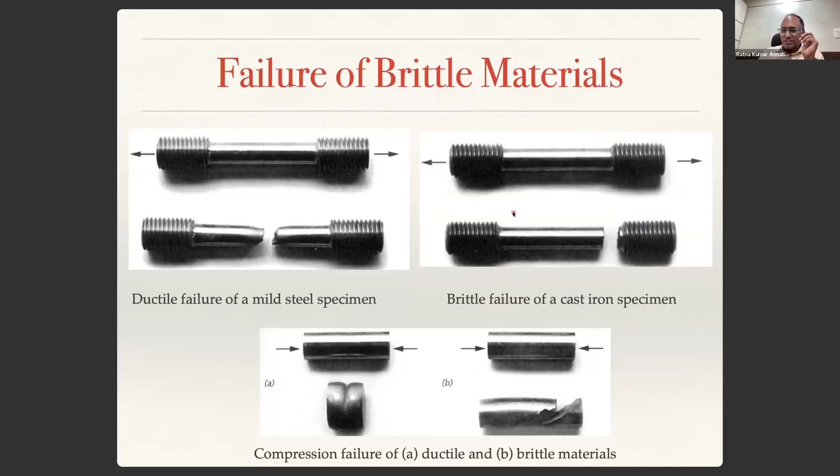We have to understand that brittle materials do not yield, they rather fracture. For brittle material, fracture in tension is only due to normal stress, because the failure is completely governed by normal stress—whichever plane has maximum normal stress, that plane is going to break apart. So now, because the critical stress is only normal stress, we need to use the maximum normal stress theory, which says that failure occurs wherever the maximum normal stress reaches the critical value. Here the critical value will be ultimate strength rather than yield strength. So the maximum normal stress theory can be applied for brittle fracture in tension.

Now for compression, you can see that failure happens due to a combination of normal stress and shear stress. So brittle fracture in compression is due to a combination of normal and shear stresses, and hence it requires a different theory—you cannot use the same theory as for normal tension. Depending upon the type of loading, you have to use a different theory. So when the loading is tensile, the failure can be completely governed by the normal stress theory, whereas when the loading is compressive, the failure is not governed by normal stress alone; the effect of shear stress also comes into picture. This is something we have to keep in mind.

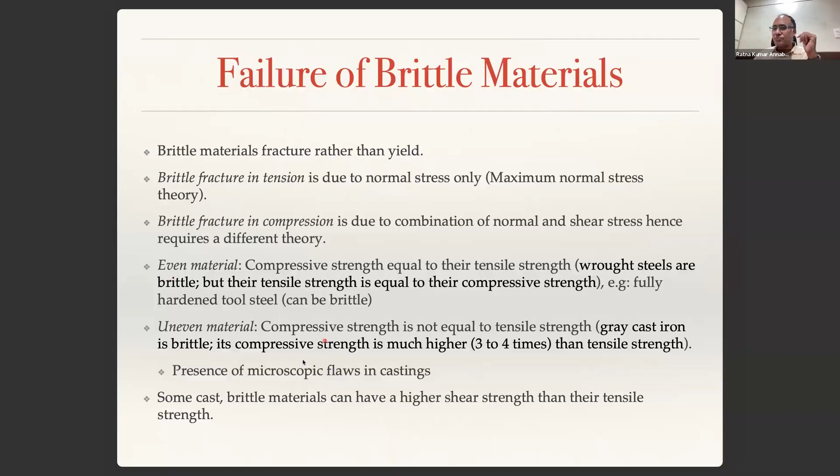This is because in castings, you have several microscopic flaws that become fracture points. So it's much easier to open a crack under tension rather than under compression—that's why under compression they have much higher strength. Sometimes some metals also show uneven response in yielding, but let us not worry about that at this point of time.

Now, if you take a ductile material and instead of applying tension you apply torsion—that means pure shear—you see, in the previous case when applying uniaxial tension, the failure happened at a 45 degree angle. But now if you apply torsion, the failure happens normal to the surface. Can you explain why it would happen normal to the surface?

Shear stress is maximum normal to this plane because you are applying pure shear. Your maximum shear stress is going to be in the same plane. That is why the maximum shear stress happens on the same plane, because you are applying shear stress and the maximum shear stress is going to be on the same plane. That is why the failure happens normal.

But if you take brittle materials, they are governed by their maximum normal stress. So if you are applying torsion, the normal stress is going to be maximum at an angle of 45 degrees.

Because if you draw the Mohr circle for pure shear, it will be centered on the origin of the sigma-tau plane, and the maximum normal stress will be at an angle of 90 degrees to the maximum shear stress. That means it is 45 degrees in the physical plane. The normal stress is maximum here, and that is why the breakage happens at an angle if you take a brittle material and apply torsion.

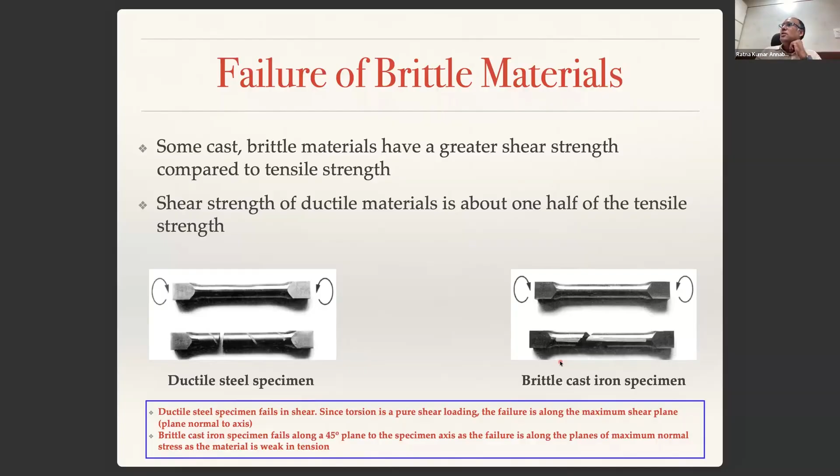Now, if you plot your Mohr circle for the case of failure: let's say you are doing a tension test, and this is your ultimate strength. When you apply ultimate strength on the tensile side, this will be your Mohr circle failure surface. If it is an even material, the ultimate strength in compression is the same as in tension, so on the compression side this will also be your Mohr circle.

Then the tangent line joining these two circles represents the failure line. So any intermediate stress state, as long as it does not become tangent to this line, will not fail. Otherwise, it will fail. That is the idea.

Now, if you have an uneven material where under compression you have a larger ultimate strength, it is like pushing this circle, and then this line is your failure line, whose angle is mu. This is what we call the friction angle.

Now we can write the equation of this line on the sigma-tau plane. Earlier we wrote failure theory on the sigma1-sigma3 plane; we could also write it on the sigma-tau plane, which is much easier for brittle materials. You see that the failure line is given by tau equals tau_i plus mu times sigma, where tau_i is wherever this line intersects the tau axis. So shear stress equals tau_i plus mu times sigma is your failure line.

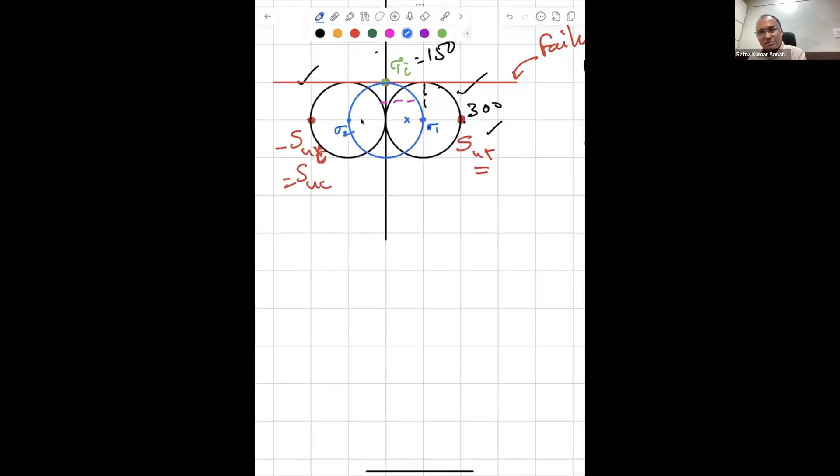Yes sir. If instead of minus 150, my sigma 2 is equal to, let us say sigma 1 is equal to 200 and sigma 2 is equal to minus 150. What is the tau max here? Our requirement is tau max is how much? 200 plus 150 by 2, isn't it? Yeah, 350 by 2, that is 175.

175. What is tau I? 150. So now 175 is greater than 150. So that means this has failed, right? Because this tau I is 150, no? So now let us draw these things: 200 and minus 150. Let us say this is 200 and minus 150. Let me draw that particular circle.

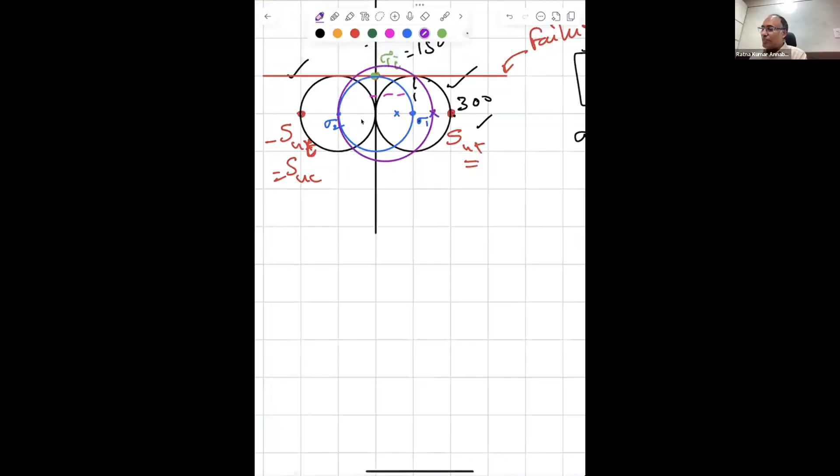What happened? This circle went beyond that failure line, isn't it? Yes, sir. So that means it has failed, which we were actually able to see from here.

So the point I'm trying to make is, if you identify the failure line, and if a material is failing, then the corresponding Mohr circle should become tangent to the failure line at best, or it should not cross the failure line. If it crosses the failure line, the factor of safety is less than 1. If it becomes tangent, the factor of safety is 1, meaning it has just failed. If it is under the failure line, the factor of safety is greater than 1.

So now, in the same picture, let us take the scenario of uneven material. If you have an uneven material whose failure surface is, let's say, sigma UT or SUT, and SUC is double that. This is my SUC, UC, which equals minus 2 times SUT. In this particular case, it is double.

Now, if I draw the Mohr circle for the uniaxial tension case with SUT, let me draw that again. Oops, happened. So that is my uniaxial tension case Mohr circle.

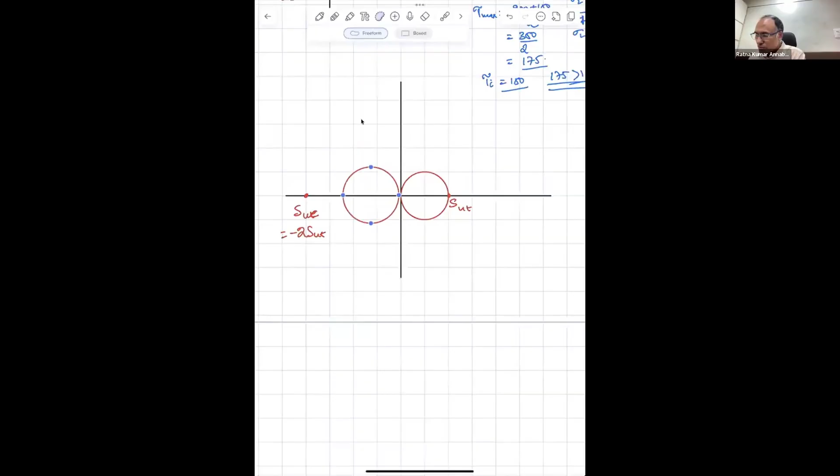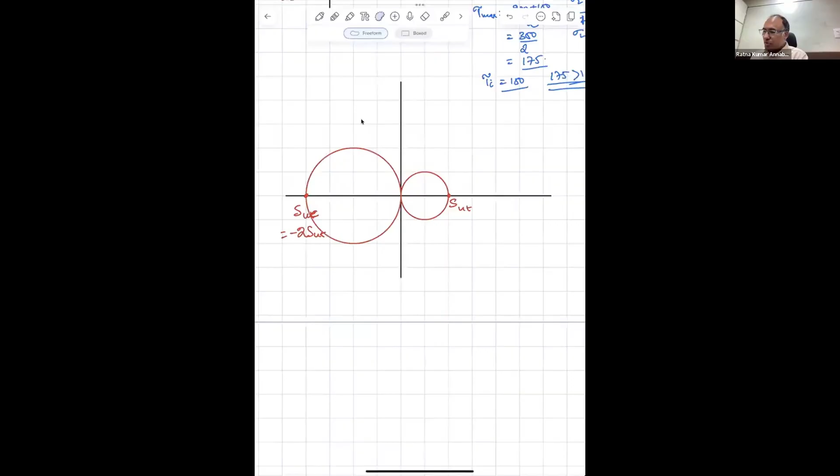And similarly, the uniaxial compression case, so that is the Mohr circle for uniaxial compression. Now, how does the failure surface look like? That should be tangent to these two lines, right? So now I need to draw a tangent.

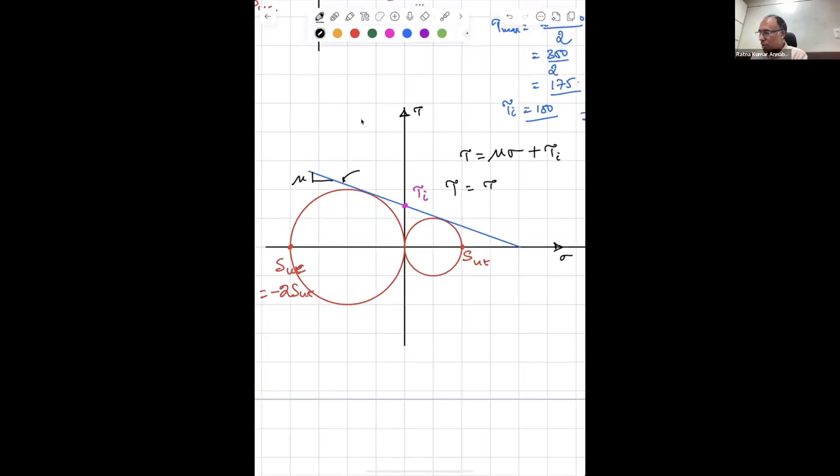Right, I have drawn this tangent, and this tangent intersects at this point. Let me call that tau I. And the slope of this line is mu. This axis is sigma, and that axis is tau. Now, the equation of this line: tau is y, m is mu, x is sigma, plus y-intercept tau I. So I can write tau equals tau I plus mu sigma. That is the equation of this failure surface.

Now, whenever you take any stress state, you plug it into this equation, and if the stress state satisfies this equation, then it is failing. If tau is less than tau I plus mu sigma, then it is safe. Otherwise, it is not safe.

Or in other words, if you plot sigma 1 and sigma 2, and then draw a Mohr circle, and this is inside the failure line, hence it is safe. But let us say, when will it become unsafe? Let us look at that.

So sigma 1 is the same, but let's say sigma 2 is changing. So when sigma 2 reaches this value, you can see the circle is becoming tangent. So if you have sigma 1, your sigma 2 cannot be greater than this value, because beyond this value the circle is going to cross the failure line. So given sigma 1, your sigma 2 should be less than this value. Only then will the material be safe, otherwise it is unsafe. Is that clear?

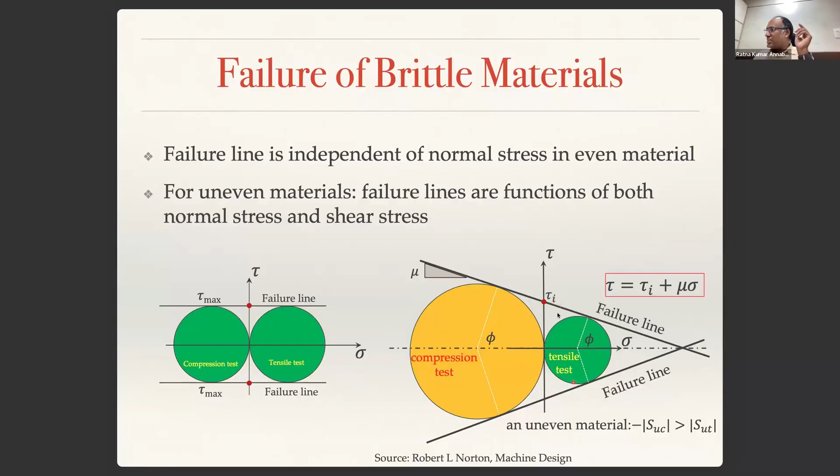Then you have the Mohr failure line; instead of two circles, you can draw a straight line, but ideally you should also do a shear test. Then you should draw a common curve that is tangent to all three circles. So then it will not be a straight line, it will be a curve, called the failure curve. This failure curve is called the Mohr failure curve, and this is what we call the Mohr hypothesis.

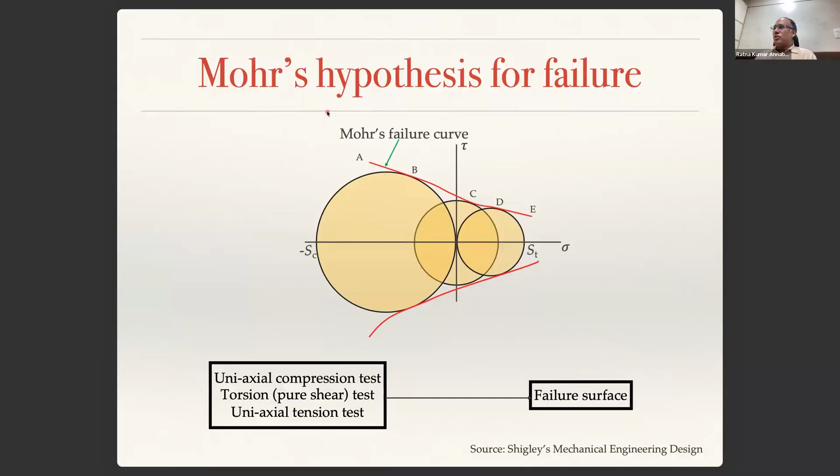So now let us look at the theory for brittle materials. This is what we call Mohr-Coulomb theory. So now let's say this is your uniaxial tension circle, and this is your uniaxial compression circle. Any questions there?

Once you have the uniaxial tension circle and uniaxial compression circle, you can draw a Mohr-Coulomb failure line, which decides what tau is and so on. Now, if you draw a stress state corresponding to sigma 1 and sigma 3, and this circle becomes tangent to the failure line, that means it is failing. So let us look at the stress state corresponding to sigma 1 and sigma 3.

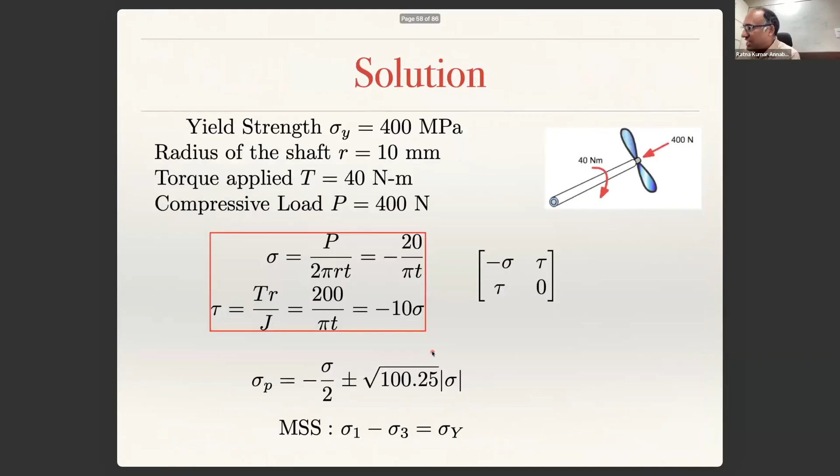So there is a similarity between maximum shear stress theory and Mohr Coulomb theory, except that it is an uneven material, and hence it becomes sigma 1 by ST minus sigma 3 by SC equal to 1. So what we have done, why have we chosen this pink circle? Because this pink circle is also a failure surface, so when failure happens, this equation will be satisfied. Sigma 1 by ST minus sigma 3 by SC should be less than 1 if the material is safe, or equal to 1 or greater than 1, the material is unsafe. This is what we call Mohr Coulomb failure theory.

Now I will not draw this line for you. So ST is ultimate strength in tension, SC is ultimate strength in compression. So now let me, without spending much time, recall how we have drawn our failure surface for maximum shear stress theory. For maximum shear stress theory, the way we have drawn the failure surface is: this is my sigma 1, that is my sigma 3.

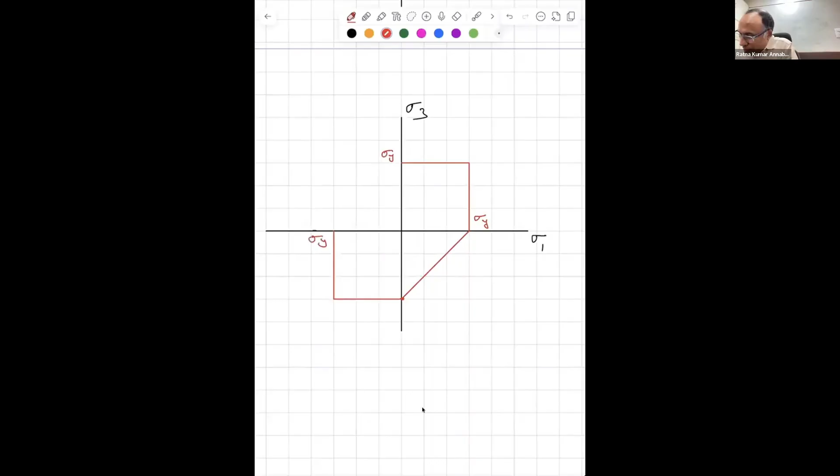Now, in the first quadrant, because that is my sigma y and that is my sigma y, 1, 2, 3. And here this is sigma y. This is how my maximum shear stress theory looked like, right? This can be written as sigma 1 by sigma y minus sigma 3 by sigma y is equal to 1. Can I do that? That implies sigma 1 minus sigma 3 is equal to sigma y.

That is how we have generated this. We have discussed how we got these lines, correct? All of you agree with this or not? Yes, sir. So now what I want to do is sigma 1 by, instead of sigma y, ST minus sigma 3 by SUC equal to 1. That is what I wanted to deal with.

So all that I need to do, let us say this is my, this is also my SUT. But SUC, this one, SUC is greater than SUT. So let's say that is my, in the negative direction, I have to identify SUC. And this is my SUC. For each, both of them are normal stresses, no? And this is my SUT. Agreed?

So now, in the compression side, when both are negative, because it is an even material, this bounds are sigma y and sigma y. I have drawn these lines, but now it is a different value. Then I would draw this. On the tension side, it will remain this because that is SUT. And now these slant lines will be between this fellow and that fellow, just by looking at this equation.

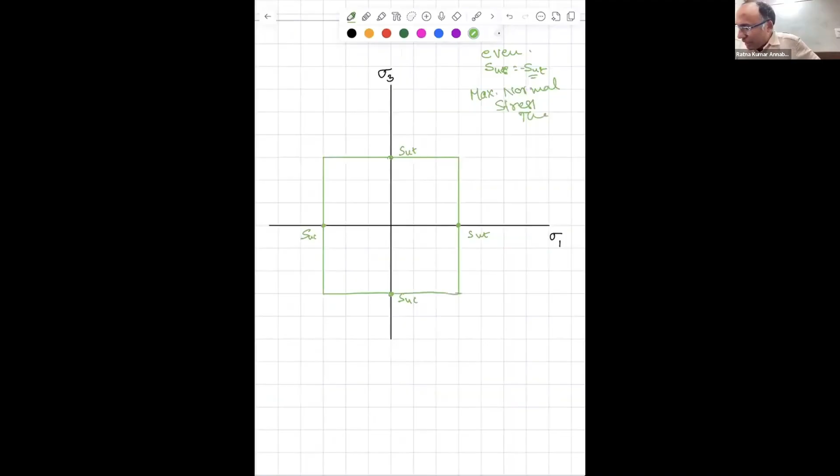So if it is an even material, my maximum normal stress theory - what does normal stress theory say? That the normal stress should not be more than sigma y. So my failure surface will be a square. That is my maximum normal stress theory, isn't it? Yes, sir.

For an even material - for an uneven material, all that I need to do is identify my SUC. Let us say that is my SUC, instead of tension this much, but in compression, that is my SUC. Then the maximum normal stress theory becomes what? A rectangle? It will become a square still, but it is shifted - the origin is not anymore the origin. It is an asymmetric square, isn't it? Yeah.

So these are the points for maximum normal stress theory for even material, and those are the boundary points for maximum normal stress theory for uneven material. Correct?

Now, if you are doing Mohr Coulomb theory, then for an uneven material, Mohr Coulomb theory will be that - that will be your Mohr Coulomb theory. All of you agree with that? The blue is Mohr Coulomb for an uneven material.

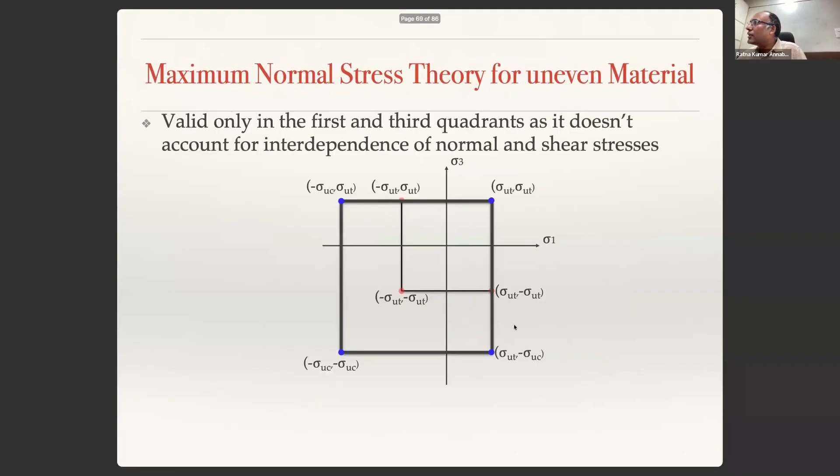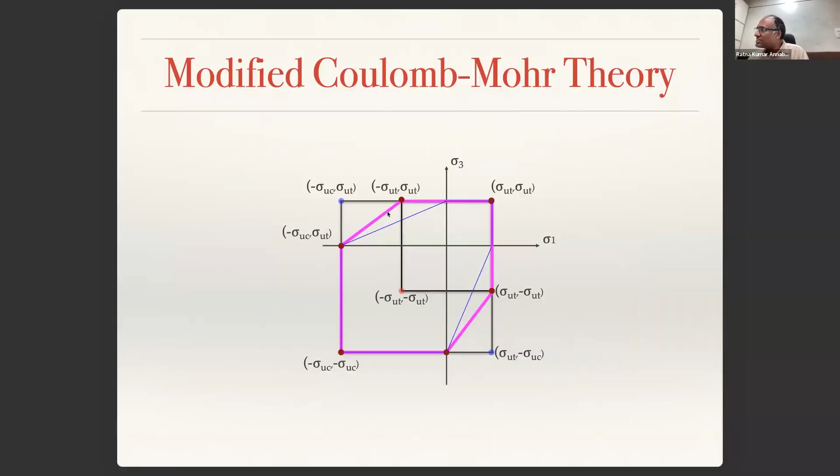Okay, so let me show you the slides. This is your maximum normal stress theory for even material, that will be your maximum normal stress theory for uneven material, and that's your Mohr Coulomb theory for uneven material. That is modified Mohr Coulomb. So this is Mohr Coulomb for even and uneven material only. But this pink one - yeah, whatever color that is - it is for modified Mohr Coulomb because this seems to match with the experimental data better.

Since the experimental data matches better with the modified Mohr-Coulomb theory, people have said that although Mohr-Coulomb is okay because it is more conservative, in order to save material, the suggestion is to use modified Mohr-Coulomb instead, since it matches the experimental data more closely. That is the reason the modification is suggested for the Mohr-Coulomb theory.

The equations for modified Mohr-Coulomb are much more complicated. You need to break it into cases: when sigma 3 is less than or equal to sigma UT, the failure surface is this equation; if it is greater, the failure surface equation is different. Previously one equation sufficed, but now you need separate equations for each region. This makes the mathematical manipulation more difficult, but the idea is to stay close to the experimental data.

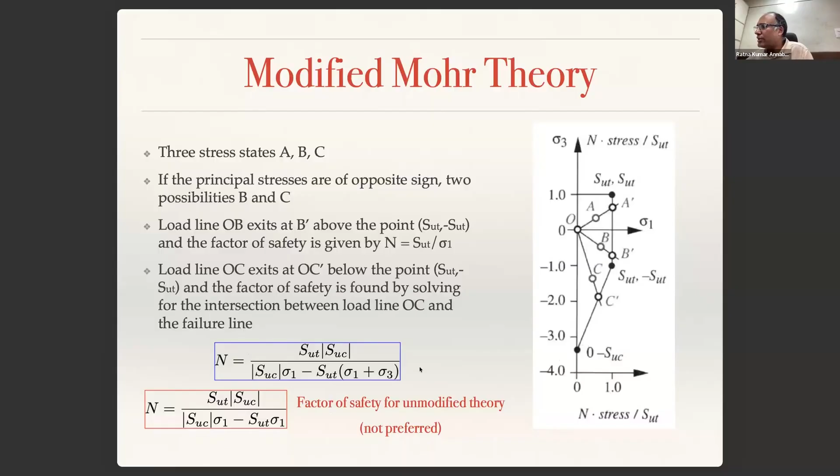However, we saw in distortion energy theory a very nice thing, right? For an extremely complicated three-dimensional state of stress, you have an equivalent stress, like a one-dimensional stress, and you just compare that equivalent stress with the yield strength of the material to determine whether failure is happening. Can we do a similar thing for brittle materials also?

Norman E. Dowling came up with this prescription, where he said you can come up with something called an effective stress. When this effective stress becomes equal to the ultimate strength in tension—although the ultimate strengths in tension and compression are different—he came up with a prescription where you compute the effective stress and compare it with the ultimate strength in tension. If it is less than that, it is safe; more than that, it is unsafe. The effective stress sigma tilde is the maximum value of C1, C2, C3, sigma 1, sigma 2, sigma 3, where sigma 1, sigma 2, sigma 3 are the principal stresses.

C1, C2, C3 are computed from this, in which SUT is the ultimate strength in tension, SUC is the ultimate strength in compression. If you write a program, the computer can calculate these things, and it is much easier to compute the factor of safety using this formula, the ultimate strength divided by the effective stress. Similar to von Mises yield criterion, where factor of safety is sigma y by sigma equivalent. A similar formula can be used for brittle materials also.

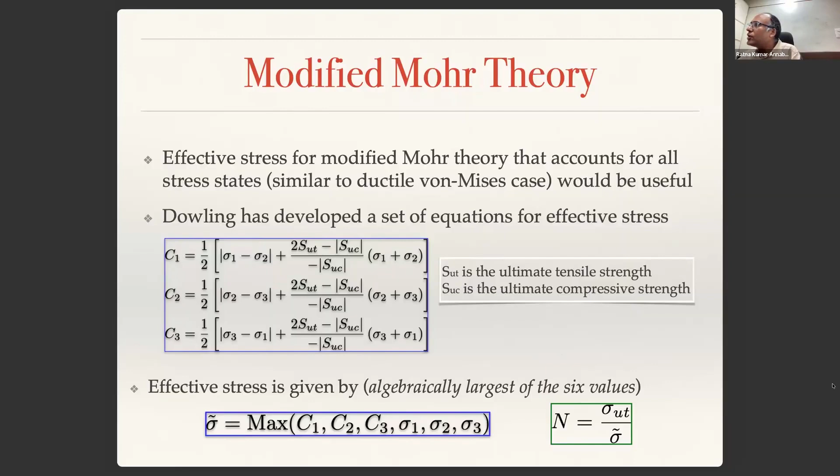Okay, now let's solve this problem then. Don't say yield strength, take this as ultimate strength in tension, ultimate strength in compression, these values.

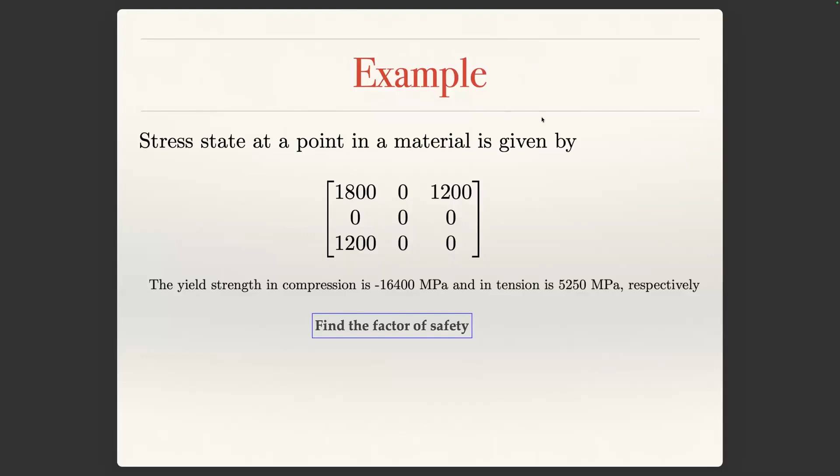If you have sigma 1 and sigma 3, now what is the equation? Sigma 1 by ST minus sigma 3 by SC is equal to 1, right? Sorry, I was not able to see the formula, so I could not get the intuition, sir. No problem, that is the formula. Just can you repeat, sir, once again please? Sigma 1 divided by ST, minus sigma 3 by SC, is equal to 1.

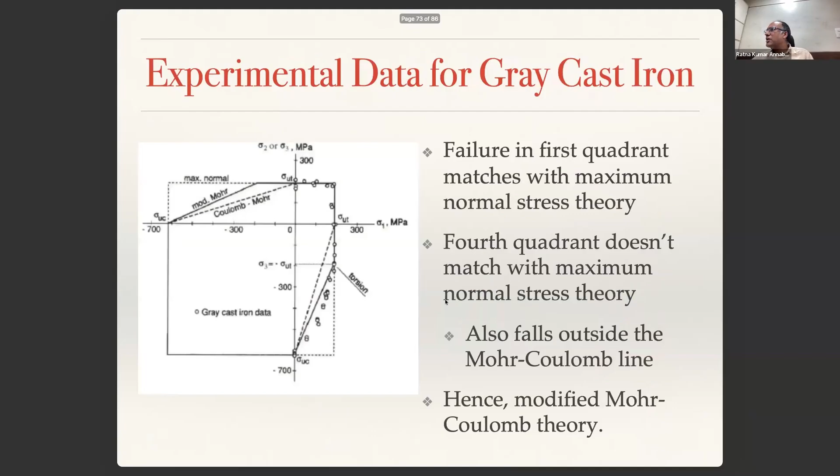I don't know the value, but let me see, I have to check the slide must have the value. Yeah, 2.1875, don't worry about it, because this is computed for the modified Mohr Coulomb. So modified Mohr Coulomb will have a higher factor of safety compared to normal Mohr Coulomb. So modified Mohr Coulomb can be calculated using this formula.

So this we should not remember, sir, for the exam? No, but sigma 1 by ST minus sigma 3 by SC should be remembered. Noted.

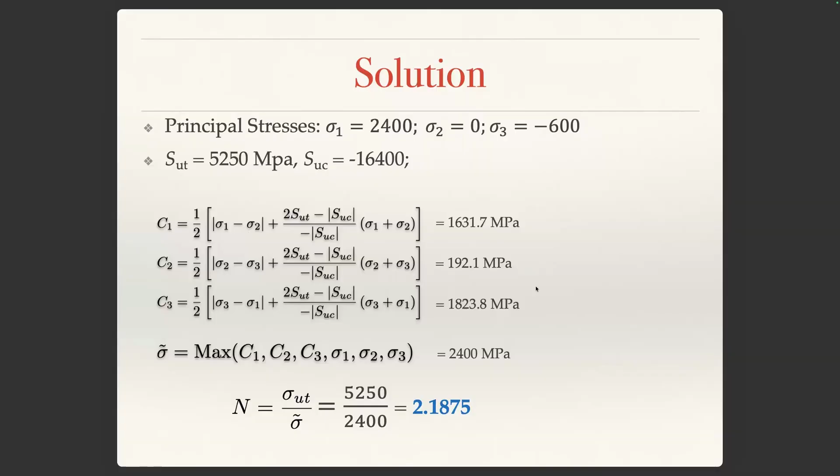Sir, can you explain from the formula how we are getting the factor of safety, sigma 1 by ST minus sigma 3 by SC? So the factor of safety formula will be, if it is equal to 1, then, see, if this is equal to 1, then it is exactly failing, right? Yes, sigma 1 by ST minus sigma 3 by SC equal to 1 means it is exactly failing. So if you want to include factor of safety, it will be in the denominator, 1 by n. So the equation will be sigma 1 by ST minus sigma 3 by SC is equal to 1 by n. And then by plugging in these equations, you will get the factor of safety.

You can see that, let us say ST is equal to... and SC are same, right?

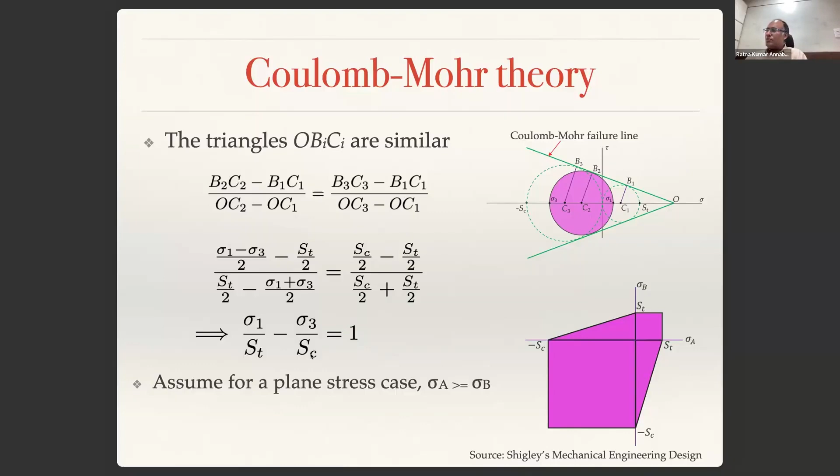I would like you to go through this equation. Sigma 1 minus sigma 3. The fact is tau max is equal to sigma ys. That is when failure happens.

Yes, sir. Tau max is when tau max is equal to shear yield strength. That is when failure happens. So the factor of safety will be sigma ys by tau max. Yes, sir, sigma ys by tau max.

Tau max. What is tau max? Sigma 1 minus sigma 3 by 2. Yes sir, tau max is sigma 1 minus sigma 3 by 2. What is sigma ys? Sigma y by 2.

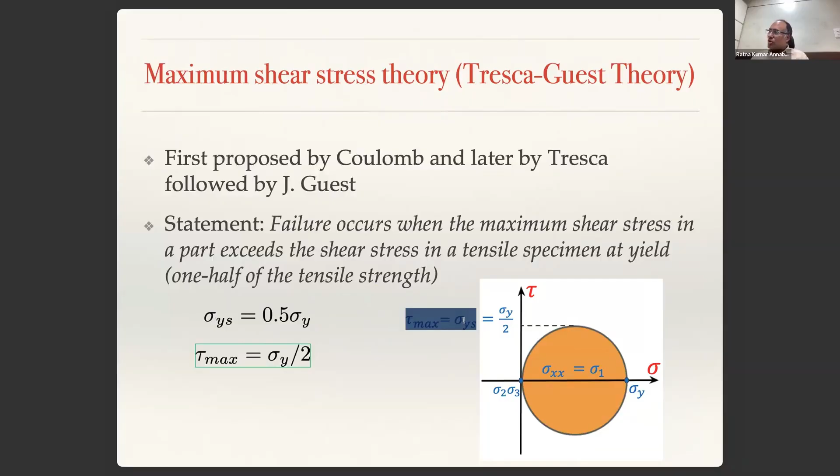So your factor of safety will become sigma y by sigma 1 minus sigma 3. Is that clear? Maybe I will write it down. Yes sir, if I don't write it down, maybe it is difficult to follow. Let me go back.

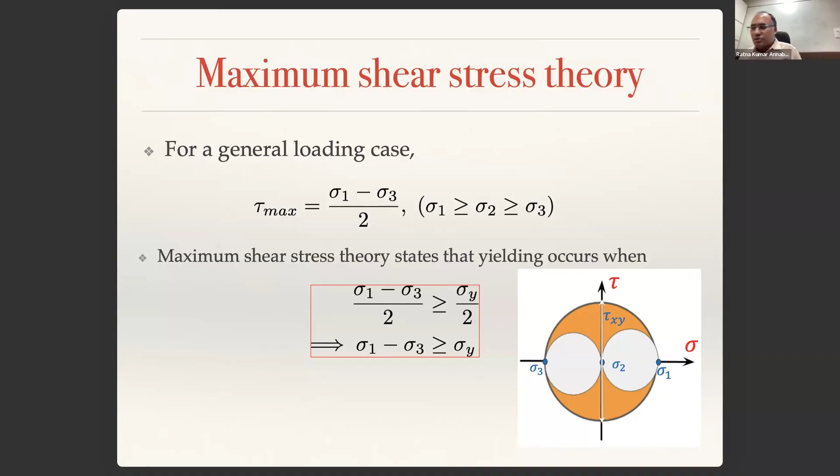Now let us look at the maximum for an even material. Let us forget about uneven material. For an even material, what is the formula? Sigma 1 minus sigma 3 is equal to ST. That is the failure criterion, right?

So the factor of safety will become ST by sigma 1 minus sigma 3. Do you agree? Or this can also be written: sigma 1 minus sigma 3 is equal to ST by n, or sigma 1 by ST minus sigma 3 by ST is equal to 1 by n.

Now ST and SC are not the same, so sigma 1 by ST minus sigma 3 by SC is equal to 1 by n. Understood. Okay.

Further, we can bring n to that side, and we can bring all the terms to the denominator. Any which way, the equation is the same, just a rearrangement of numbers. So now your factor of safety will become SC times ST divided by sigma 1 SC minus sigma 3 ST.